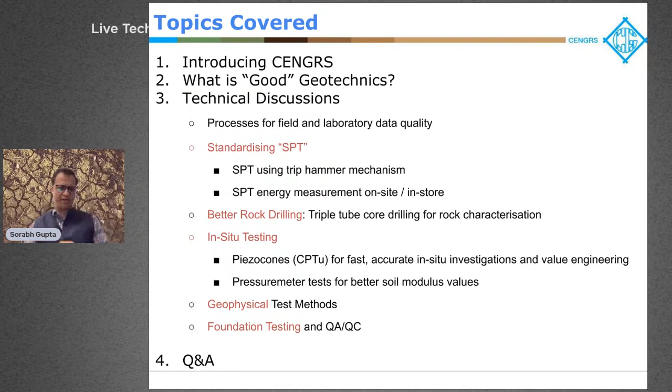So first, I would like to introduce you to my company. It's Cengrs, CENGRS - it's an acronym for Civil Engineers. Many people don't get that. We are an old company, founded in 1990, led by IIT Delhi alumni, myself included. We are now about 200 people, and we have carried out over 6,500 investigation projects across the length and width of the country in the last 32 odd years.

We do work, of course, as geotechnical engineers. We get an opportunity to work in different segments in all kinds of projects, from power plants to buildings and factories, and we have carried out the length and width.

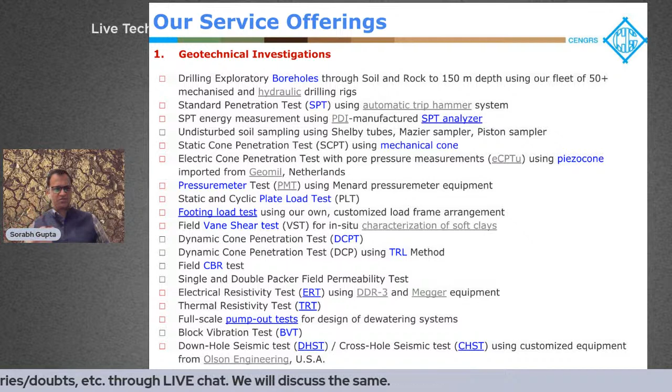In terms of service offerings, I'm not going to go through this. A lot of this is available on our company website, but it should suffice to say that almost every kind of modern geotechnical investigation technique which is out there, we carry these out in house. We are very much interested in pushing the envelope as a company. Our motto is to always push the envelope and try to bring in new technologies which are successful all over the world, bring them to our country, so we can be self-reliant.

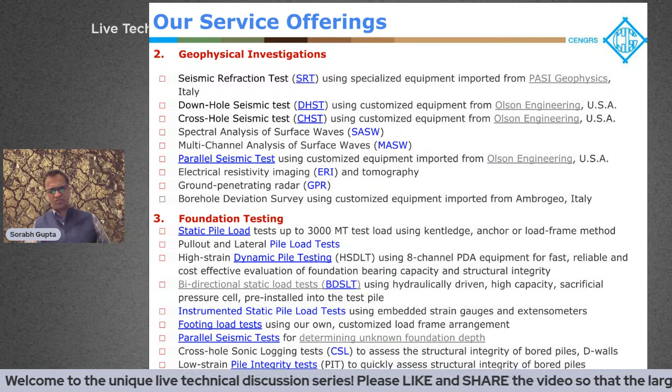and carry out the best practices from all over the globe. In terms of geotechnical, geophysical, foundation testing, these days we have a lot of tools which are available to us for proper characterization. We also take up consultancy jobs. So we take up a lot of analysis projects, whether it's Plaxis analysis or slope stability, hard stand design, and so on and so forth.

We are very active, and I think this is important. I encourage more and more of us to actively participate in professional bodies. There's so many of them. The Bureau of Indian Standards has many committees where we can upgrade the codes. Indian Roads Congress, IGS, ISSMGE, DFI. I do encourage all the participants to sign up for these professional bodies, because this is where we can interact as professionals, learn from each other, and contribute to the profession as well.

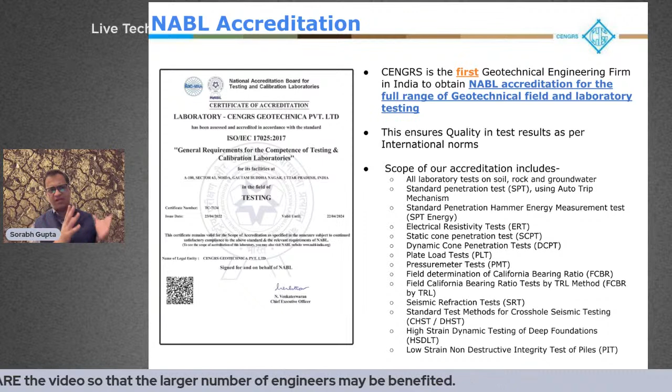I would like to announce, in fact, one of the latest developments - some of you might have heard of NABL. Traditionally, many of the geotechnical consultants adopted NABL for the laboratory. Starting 2022, I think we are one of the first companies - we have extended the range or the scope of our NABL accreditation to cover the entire spectrum of our field activities as well. And this is pertinent because we genuinely believe that a lot of the strength of investigations really comes from the field testing, possibly a bit more than lab testing even.

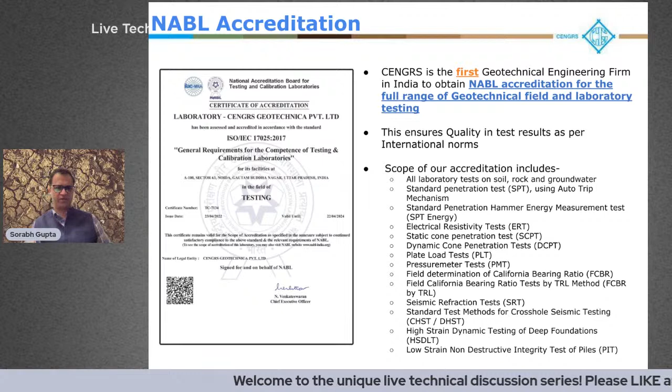So quality assurance and control on sites becomes very, very critical. I do believe we are one of the larger geotechnical databases in the country, and I am keen to work with - if you have any GIS experts, please contact me separately. I'm keen to put all this data together and develop a subsurface model for the country. We don't have that yet. I think this is something which will be good for all of us.

I'll get into it. We keep talking about good and bad geotechnical engineering. I would like to talk about, in our opinion, what is good geotechnics. We believe there is no such thing as difficult ground. If you have a site which may not have the best soil conditions, which might have some challenges - liquefaction or slope stability or so on and so forth - don't be disheartened, because just like the Rubik's cube, the puzzle is only as hard as the person who's solving it. So if you have the right team with you, the right consultants, then a lot of these problems can be solved very easily.

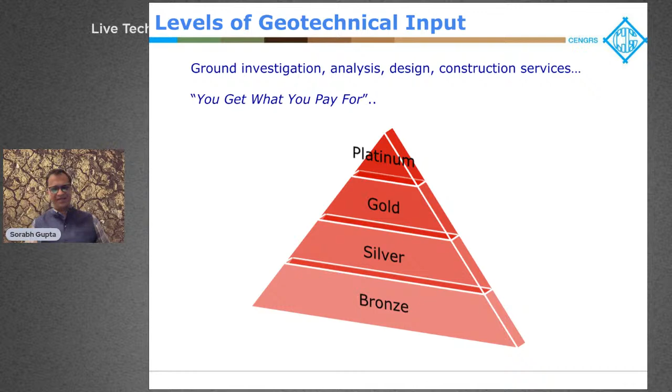This is something I borrowed from a friend of mine called Chris Haberfield, in Australia, and they talk about levels of geotechnical input, and we'll get into this. We like to characterize levels of geotechnical input in terms of bronze, silver, gold, and platinum. And the theory is, depending on your project use - if you're working in a low risk project, maybe you're building a small G+1 building in a relatively stable soil condition - then maybe you can carry out a very basic investigation consisting of a couple of boreholes, some basic lab testing, and with local experience, you can get some fairly good estimates of bearing pressure and so on and so forth.

However, if you're coming up with a high risk project, and I define high risk as either the structural demand is fairly high relative to the soil conditions, then the best way forward is to work with your geotechnical consultant and carry out a staged investigation. You can do a preliminary investigation, get some basic data, understand where we stand, run some numbers, and then we have to work together and carry out a detailed investigation tailor made for that project.

The reason I'm emphasizing this is because the scope of geotechnical investigation must never be a copy paste job. I see a lot of inquiries and RFPs where it's the same thing copy pasted without any thought about what we are building, where we are building it, what challenges we might expect. It has to be an iterative process. We have to design the scope of the investigation for each project, and the better we do it, the better the outcome, the better the optimization of foundations, the better the economy.

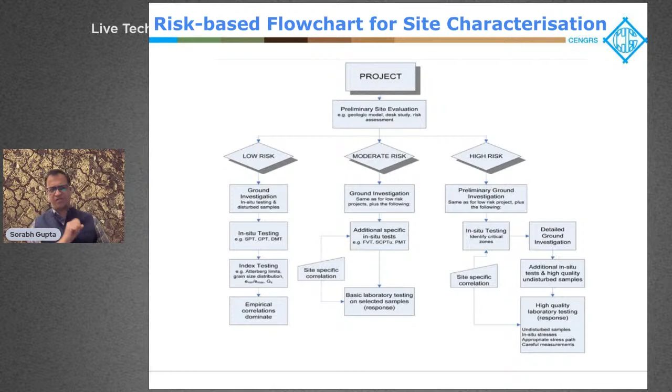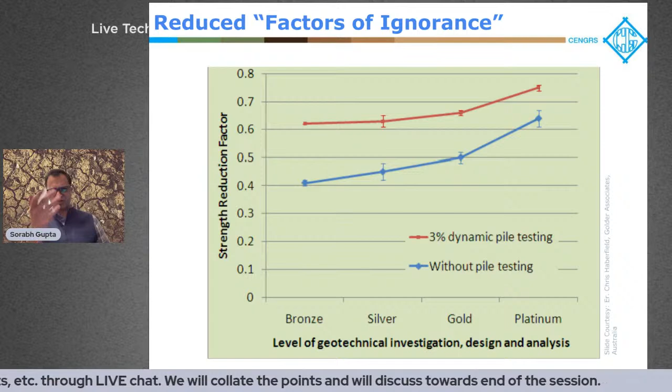We always like to say that you get what you pay for. It's important, and it's documented all over the world. If you spend on proper investigations, proper testing, you plan it, you design it, you implement it, you are going to see a lot of savings in terms of project schedules, project cost, and also risk mitigation, which is very important.

A lot of our Indian projects, although we are moving forward, we are routinely seeing issues at site during construction, reinvestigations, redesign, additional piles, and all of these things can be avoided if you get the right guidance beforehand.

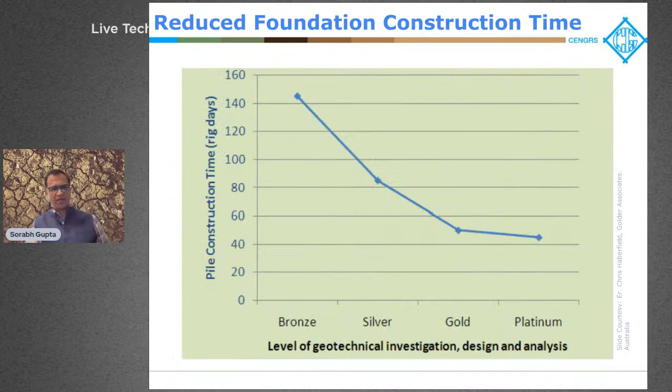This is also a study which was published, and you will see, and this might seem remarkable, that if you spend more on proper ground investigation, it makes sense that then naturally you're going to see a lot of ROI in terms of saving in construction time.

At CENGRS, we have actually documented a lot of case studies where we have done this, and we have shown ROIs of as much as 100 or 200 times the cost of investigation, purely just in foundation cost saving.

There are many areas of improvement, and I will not have time to go through all of these in detail, but let's pick out a few. How can we improve the way in which we are working today?

So before we get into advanced investigation and advanced analysis techniques, we have to understand the data which we are entering into the software. We have to understand where the data is coming from, and we have to ensure that the data is accurate. If you go to a doctor with the wrong blood test report, there's nothing the doctor can do for you. So the first step should be to get the right test results, and this is what we are emphasizing on today.

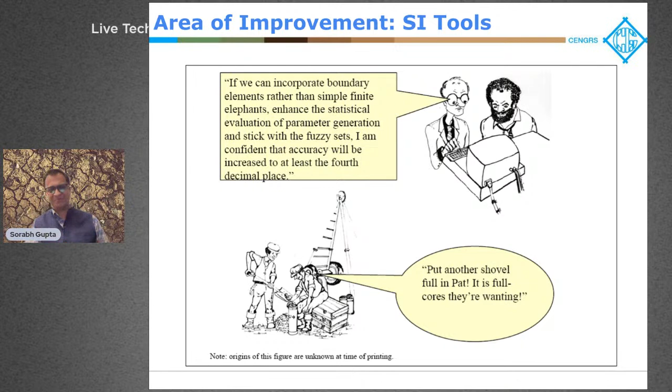In terms of tools, as I explained earlier, and we will talk about this in detail later on, these days there are a lot of techniques which are available, some better than others, some more pertinent to your project site than others. So as I said earlier, you have to tailor your approach, you have to tailor your scope for your project. And as a company, we are always keen to work with customers for this.

Many people come to us without a scope, and they come to us with a requirement, and we work with the structural engineers free of cost to work out a scope for the clients. And I'm happy to do this for any of you for your projects as well.

SPT, so I will not get into this in detail, but you can see that using advanced investigation techniques, using field instrumentation, construction monitoring techniques, will definitely be an area of improvement here.

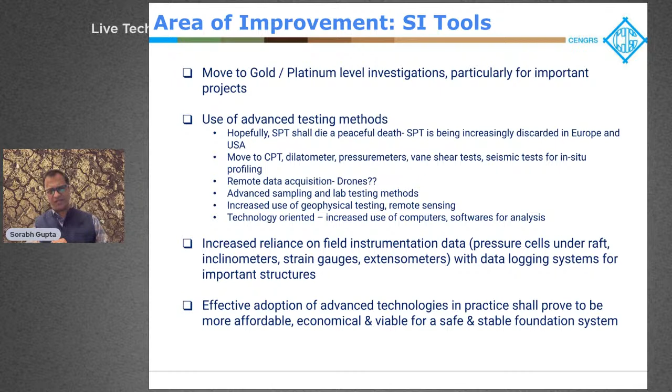I'm going to skip through a lot of this. I will be sharing the slide, but suffices to say that we do believe that although geotechnical engineering is a science, its practice is an art. So please, when you define the scope of your investigation, scope of your pile testing, work with a geotechnical consultant who can guide you properly on what needs to be done.

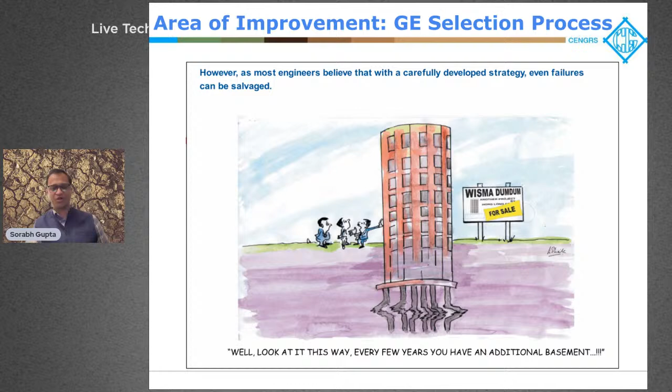And we all know about the Leaning Tower of Pisa. I think had they planned the investigation properly, it would not have been one of the wonders of the world. They got lucky. A lot of structures are not so lucky, and they simply topple. So let's not take that as a benchmark for us.

This is what I said earlier. Just like there is a difference between a diagnostic center and a doctor, there is a difference between a soil investigation agency and a geotechnical engineering consultant. And these two are not always the same. There are several companies, like ours, where they have in-house expertise to carry out investigations as well as consult on the project, but not all. These two don't have to be the same.

We do emphasize that once again, the approach must be finalized with the help of a geotechnical consultant. The actual investigations must be carried out by a company which has got strong processes to ensure that the data quality and consistency is there.

And please, I know we say this in all the forums, and I understand the limitations, but for your next project, try to avoid the L1 technique of selection. Do select your consultant, select your investigation partner based on their profile, based on their expertise, and based on what you're going to get out of it.

Remember, the cost of investigation for most projects, in India at least, is usually less than 1% of the project cost. And the impact of this investigation is directly on 10 to 15% of the project cost, which is the foundation cost. So it's simple economics. You have to make sure you are right the first time so that your project doesn't get to go in the wrong direction.

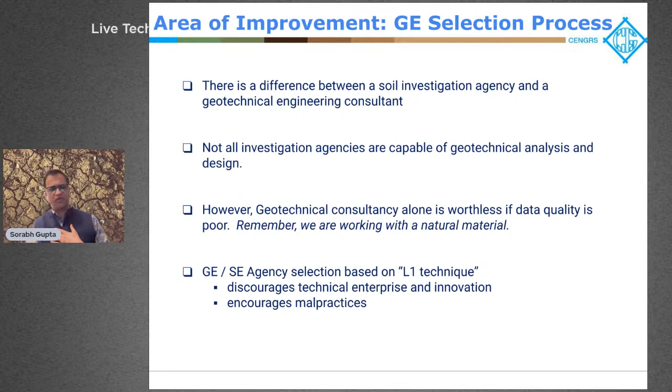As I said earlier, a planned SI program can lead to 50 to 100 times, and this is conservative, savings in terms of the foundation cost and risk mitigation. You talk to any economist, and they will say that this is a no-brainer.

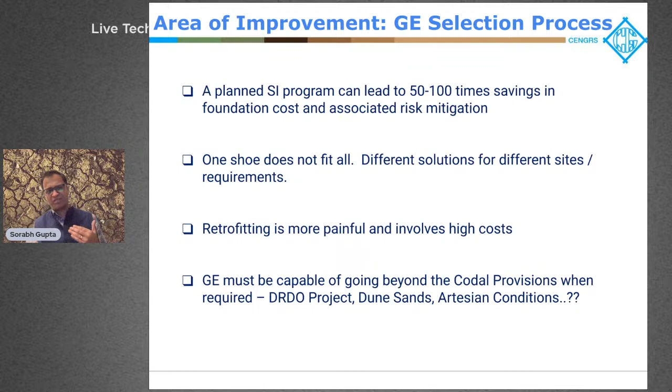Again, your one shoe does not fit all. We have to design these investigation scope for each project specifically, take into account local experience, take into account prior experience in the area, and have a discussion at the beginning of the project, not when everything is done and we're already having problems.

We have discussed this before. Especially these days, we are finding a lot of RFPs where the scope is either insufficient or just purely incorrect, or not applicable for the project site. And we do try a lot to work with the customers and give them feedback on what needs to be done. But this is something which we all have to work together on, and make sure that we use our brains at the right time.

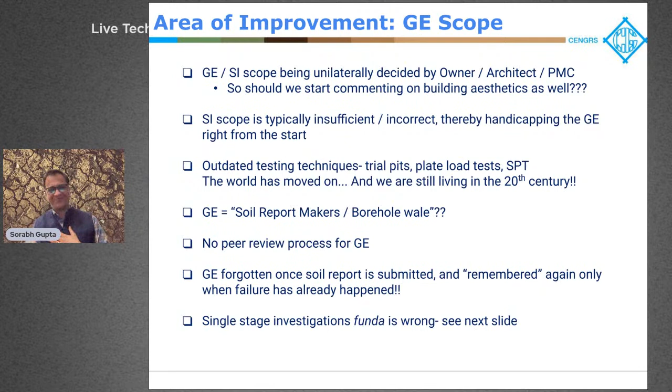This is just a point that I think a lot of the audience today consists of structural engineers as well. I think we are going in the wrong direction in our country today in many projects, wherein the owner or the PMC or the architect will normally define the scope, get a soil report, and then dump the soil report on the structural engineer, and the structural engineer works off the soil report. There is no interaction between the SE and the GE. And I think this interaction, no matter what is the size of the project, this interaction between the structural and geotechnical engineers, this is very important.

There has to be several levels of this interaction. The first must be at the concept stage. Owners must try to bring their consultants together on day one, have a brief discussion. We should understand each other. Geotechnical engineer consultant must understand what the structural engineer needs, what are they building, and this interaction has to go through all the way till the end. Even when the soil report is submitted, there must be a one-on-one interaction between us to really understand the recommendations. If there are any modifications, any changes in size, depth, then these things must be done at the design stage.

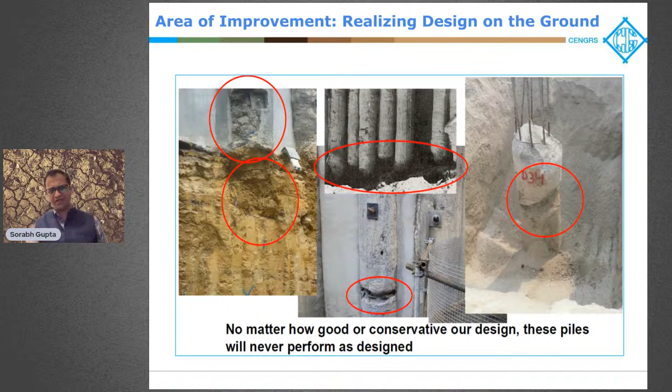And lastly, no matter how hard we try to do things well on paper, there is always a chance that the translation of that design on site is not done right. And this is very important, especially for foundation construction, because you can't see what you're building. Everything is under the ground. Everything's hidden from your eyes, and very few people understand this. So many projects, I cannot tell you, hundreds and hundreds of projects are suffering simply because of poor construction practices, ignorance at site, and it's a lot of time and money and energy being wasted on these very, very simple repetitive mistakes.

So it is important to avoid that. Again, we do emphasize that for your foundation construction, you should involve your geotechnical consultant all the way through until the construction, at least the foundation construction, is completed successfully. Because it should not be that you have one soil investigation agency and a different foundation testing agency. That should not be the case. We have to change the way we approach projects.

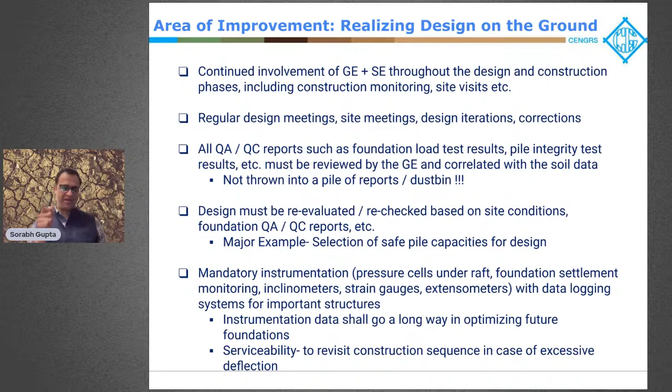Many of the contracts I see, especially for deep foundations, include the testing of the piles in the scope of the piling contractor. Now this has never made any sense to me, because it's like school mein you give an exam and you grade yourself—obviously everybody would be 100% passing in that case. So foundation testing must have a separate spec, and ideally it should be done by a third-party agency directly appointed by the owner.

So that was a quick overview. I think we've exhausted about 15 minutes. I will now get into some technical discussions. And this is the scope I made. I haven't picked everything—I've tried to pick only 5 or 6 points where I thought we can go into detail in terms of what are the advances in investigation tools today, and what should be done.

Again, we are talking about good geotechnics. This, in our opinion, is what should be done. We'll talk about processes for field and lab data quality, the SPT, better rock drilling, some in-situ test methods. I've just selected two for today: geophysical methods and foundation testing.

So let's get into it. Quality and processes. We saw this earlier, and I think this is just to illustrate.

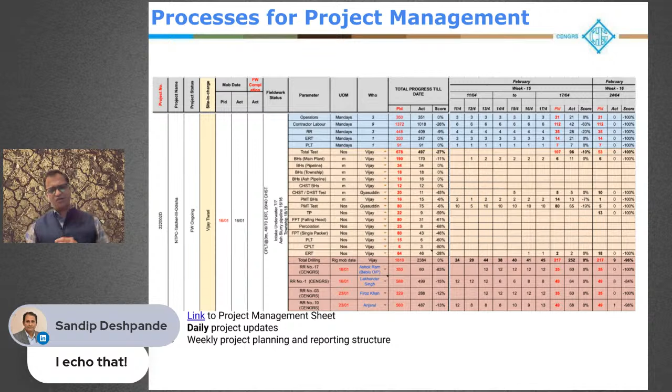See, if you think about it, every investigation job—the quantum of data being collected in the field and in the lab is tremendous. I always tell my customers that, hey, if you're not feeling well and you give a blood sample to a lab for testing, will you take a chance? Will you go for the cheapest lab, or will you go for a lab where you can actually trust the results of a blood test? Obviously most of us would like to go to a lab which is trustable, reliable, and we should know they have processes and systems built in to ensure consistent quality and won't give us the wrong results. We should think about our structures the same way, right?

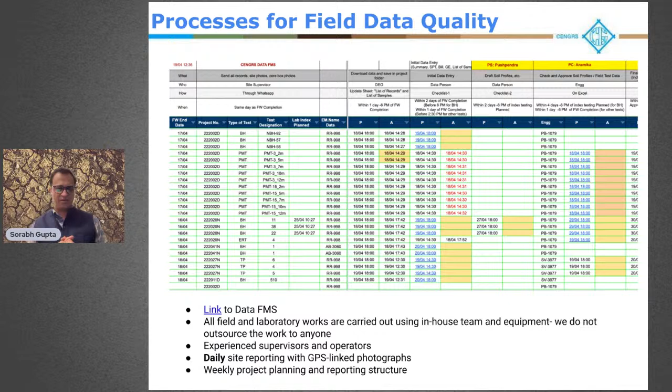At CENGRS, for example, just to illustrate, we have built a lot of systems in-house to track samples, and this is part of our NABL intent as well. We track each and every sample—typically on a site there might be 200, 300 samples collected, minimum. So we have built fairly complex systems in-house to make sure that each and every sample is tracked, tagged, and the timelines for testing and so on are all tracked in-house.

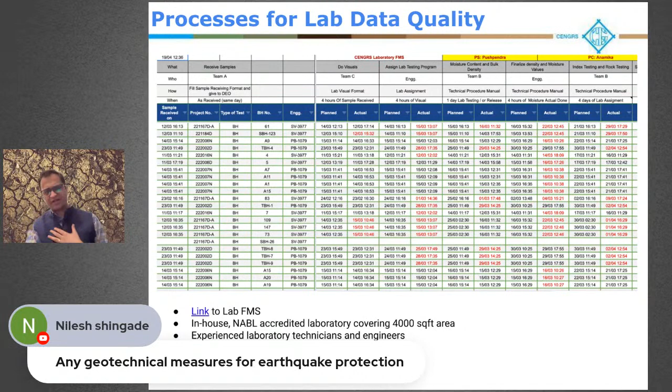It is also important, and I think if you have a bigger project this might be worthwhile—I have developed an Excel file also. Very often I see scope, maybe 200 or 300 boreholes, given to an investigation company, and they're producing reports as well. But very often I find that if I do the simple math, the lab equipment is not even sufficient to carry out the quantum of testing which they're reporting. I will leave it to the knowledgeable audience to understand how that might be done. I don't want to get into this today on this forum, but obviously in every industry there are people who are cutting corners, and as a purchaser or owner we have to be cautious to control and understand what we need to see to avoid issues later on.

This is just part of due diligence. Instead of going for the L1 technique, I think it's more pertinent that we do due diligence on the investigation partner to make sure they will treat your project like their own baby as well.

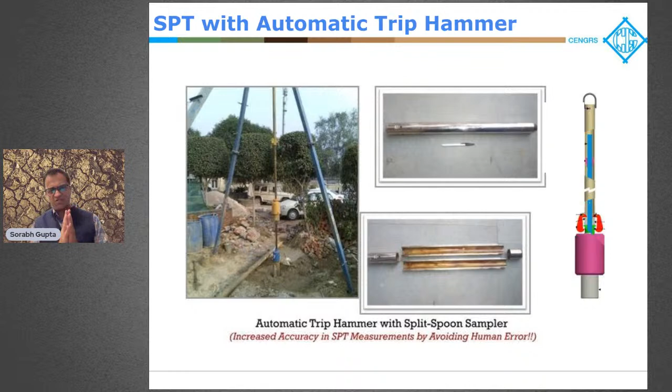So calibrate your SPT hammer, ensure automatic trip hammer so you have consistent drop height, clean your borehole properly, use the right rods, use spacers. There are so many do's and don'ts. And if you do all of these right, you are going to get much better SPT values for your design.

The next value add which we started doing, and these days on most of our projects - this is a recent development. The SPT value which is used in almost all correlations, including bearing pressures and pile capacities, is supposed to be N60. N60 means it assumes that 60% of the energy is being transferred to the soil. This is the baseline assumption for almost all correlations we use. Until about a couple of years back, to be honest, none of us really knew what our energy transfer ratio was, because we never measured it.

Now we have this tool, and a lot of geotechnical consultants have this tool - it's called an SPT analyzer. It's based on the PDA concept, or wave mechanics. What we do is connect this instrumented rod when we do the SPT. It's a field test, and it actually measures your energy transfer ratio on site.

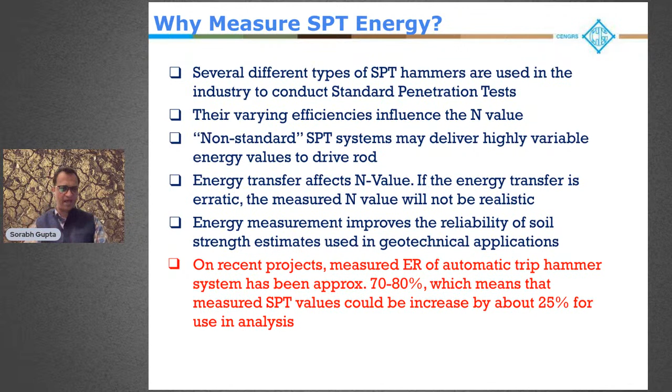Why is this important? Because it makes a huge difference. For example, for our regular shell and auger kind of rigs with automatic trip hammer, we have found that the ETR value we actually get on site is as much as 70 to 80%. It's not N60 - what we're actually measuring on site is maybe N80, N70. That means if I measure an N value of 10, the actual N value for use in design would be 25% higher, and consequently your bearing pressure would be higher. So this is the amount of difference it makes.

If you measure your SPT energy, on one hand your ETR value is more than 60%. But on a lot of setups using a calyx machine or rotary drilling rig with a manual hammer, sometimes we are measuring ETR values of maybe 30, 40%. That means the N value you will end up getting would be much higher than the correct N value. Your design would be unconservative. There would be some risk involved, and there might be some failures of the foundation later on.

This makes a huge difference on your bearing pressure value. See, the bearing pressure—and I always like to talk about this—I think we sometimes confuse bearing capacity and bearing pressures.

Bearing capacity, the ultimate bearing capacity, is a strength parameter. That is the level at which the soil will fail below the foundations. But usually we talk in terms of stiffness. We are concerned about tolerable settlements, and we are limited by settlement criteria.

The bearing pressures are directly proportionate to your N value or to your stiffness of the soil. There is no factor of safety here, which means that if you are inputting the wrong N value or the wrong stiffness parameter, the wrong modulus parameter, you will proportionately get the wrong bearing pressure for design.

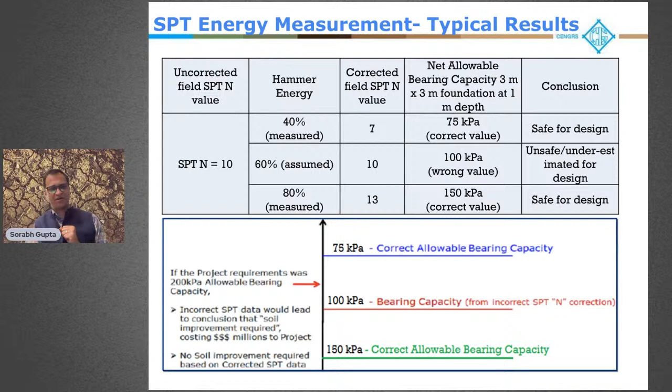So this is just to say, not to underemphasize—I think getting the right data on site, you can see how important this is for everything that follows.

I am now talking about better sampling—I haven't added the slides for this yet, but I just want to make a small note. I think the Shelby tube sampling is very much abused in our country. The emphasis in many of the RFPs is on number of samples, right? I think we need to change our mindset.

We need to change or shift the emphasis from number of samples or number of tests to quality of samples and quality of the test. If you take a rubbish sample on site, if you've got hard strata and you're just pounding a Shelby tube in that hard strata, you are not going to get reliable lab results out of it.

You are not going to get reliable shear parameters and consolidation parameters from that kind of a sample. So let's understand why we are sampling, for what purpose, and let's try to adapt our approach accordingly. I believe that if you have hard strata and N value more than 30, Shelby tubes is really of no consequence. It doesn't help you.

There are other samplers which are available. These days, for example, we are using Mazier samplers, and we are able to sample—we are able to retrieve very good quality samples, even in sand below the water table. We are able to get fairly good quality samples for testing. So sampling is important. Wrong samples will give you the wrong results.

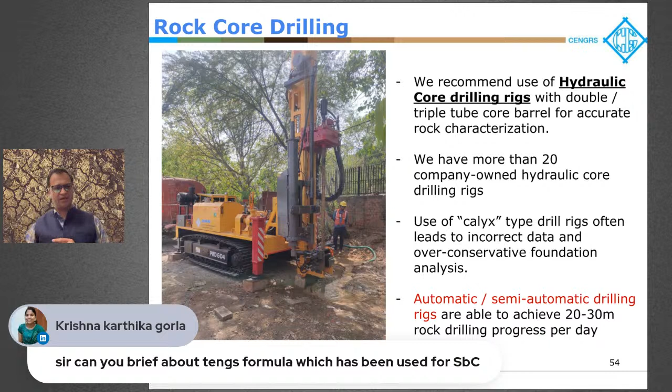Same way with rock drilling. We have a lot of equipment which is being used for rock coring. If your project has got shallow rock, or your foundations are expected to bear on rock, characterizing the rock mass becomes very important. The better you characterize the rock mass, the better you can understand the behavior under foundation loading.

In India, we are seeing a lot of kinds of rigs. Many people are using calyx rigs with single tube core barrel. Many people are using locally fabricated rigs. You have to have the right tools for drilling. If you don't use the right tools, you will end up getting a report which is not representative of the actual conditions at site.

What we recommend very strongly is that in cases where rock drilling has to be done, we should only use hydraulic core drilling rigs with double tube core barrel as a minimum, in case you have fractured rock or weathered rock conditions. Please spend those extra couple of rupees and go for triple tube core barrel. It will make a huge difference in your output.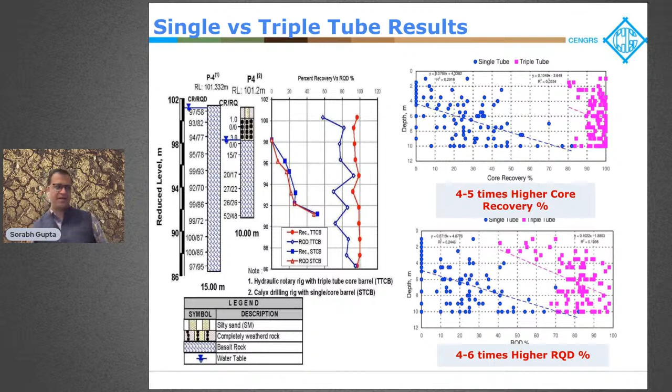What was earlier defined in the report as severely fractured rock, and designed almost like a dense sand layer, the same rock turned out to be very, very good rock—only slightly fractured, with very high core recoveries and very high RQD values. And your entire bearing pressures, your construction methodology, everything changes based on this.

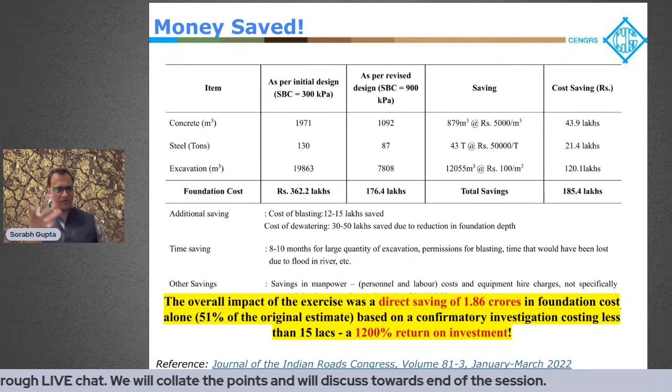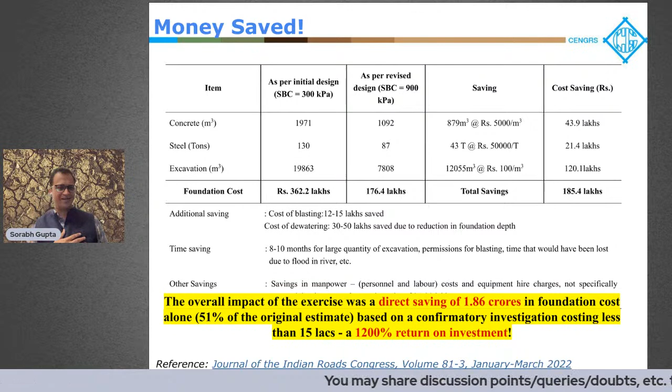And cost changes for the same project. We worked with the customer, did a quick math, and realized that by spending maybe 12-15 lakhs on this confirmatory investigation, the direct impact of the results was almost 2 crores. That's only in the cost of the foundation, only in material cost. You forget the time and everything else. So that's that by itself.

I promised you I'll show you some case studies. That's a 1200% ROI. You talk to an investor and he'll be like, hey, that makes sense, do it. So I will get into talking about in situ testing.

I want to talk about in situ testing. Going forward, as the projects are getting bigger, our time is getting shorter. I think we need to change our approach. Boreholes is not investigation, and investigation is not boreholes. There is a host of other techniques, so many techniques available where you can carry out in situ testing, field testing, and characterize the soil in the field.

There was recently at DFI a presentation by Dr. Madhav, and I would like to quote him. He said something very nice. He said that there is a difference between soil and ground.

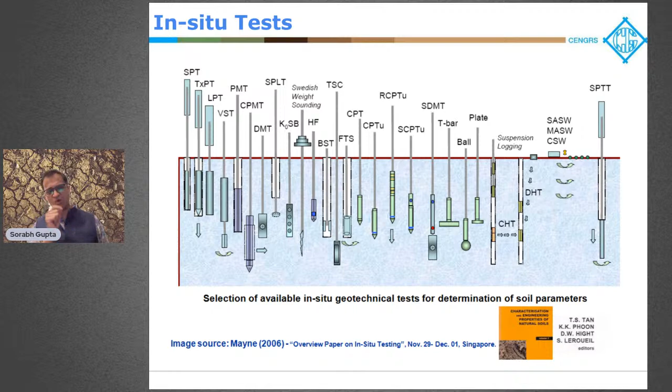Soil is that small sample which you take out, maybe from a borehole or elsewhere, and you test it in a laboratory and come up with a result. But soil is not ground, and your structure is not going to be sitting on soil. Your structure is sitting on the ground. The ground is affected by various things. The soil is not going to be homogeneous, isotropic, so on and so forth.

There are going to be lateral variations. There are going to be vertical variations. There are going to be variations in the groundwater table. There are going to be so many factors which we have to understand before we conclude if the foundations we are designing are safe for that particular site.

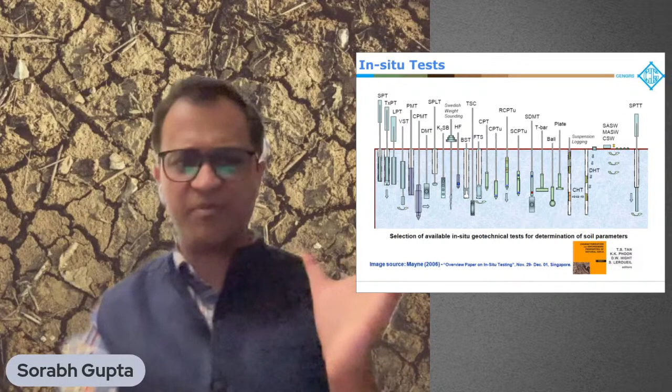I honestly believe that in situ testing is one of the best ways to understand the ground, whereas lab testing is good for understanding the soil. And both of these have to go together.

In terms of in situ testing, I think most of us are familiar with the standard penetration test, DCPT, plate load test, cyclic plate load test, block vibration test. This is what people used to use, and this is what, maybe even 20, 30, 50 years back, most of the investigations were done using.

We then moved, in the last 20 years I would say, to use of mechanical cone penetration tests, some pressure meter tests. We moved from block vibration to carrying out downhole and crosshole seismic tests. So there is some improvement which has happened.

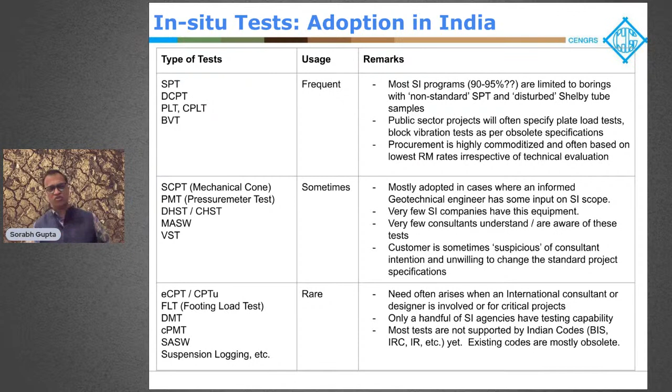But now, a lot of projects, we are changing the scope. We have come up, we are doing a lot of piezo cone testing, and we'll talk about that, to replace the mechanical cone. Footing load tests as a better form of doing a plate load test, I would say. There's also DMT, which is not very popular in India yet. Cyclic pressure meter testing, SASW. So there are a lot of tools, and it's important to understand these tools and see if we can use them on our next project to our advantage.

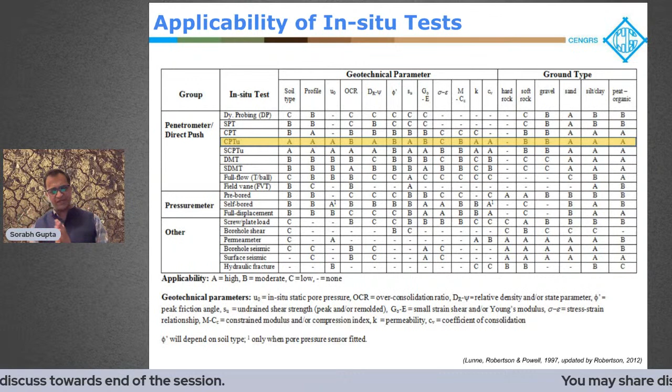This table I picked up, I think from the CPT manual. A lot of these methods are available. It's like working in the kitchen. If you're cooking, you have a masaldan with different types of masalas available to you. These tools are like that - different masalas, lal mirch, wal mirch, sab kuch hai. But it depends on the chef, on the cook, to decide which masala to use in which recipe. It's not that if CPT is good, it works everywhere.

You can't do that. It depends on your site. If you have a soil site, maybe with loose soils or liquefiable issues, CPT might be a fantastic tool. If you have a rocky formation, CPT will not work. So we have to understand each of these in situ tests, and once again, we have to plan our investigation based on our site, based on our expected strata conditions, and based on the anticipated loading conditions.

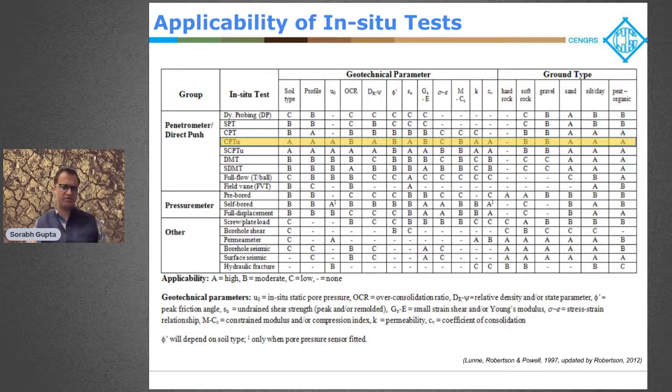Let's talk about the CPT. CPT is fairly new, and in the last 2 or 3 years, I think Sanjay, along with a lot of other consultants, we are making a big push for CPTs in India. We're literally pushing CPTs in India. And why is that?

Number one, CPT is very quick. If you're doing a borehole investigation, say as an example, if you want to do a 30-meter borehole, the time and cost of mobilizing a drilling rig, drilling that borehole, sampling, transporting the samples to the lab, doing the entire spectrum of lab testing - this is easily a 15 to 30-day effort before you get some kind of data for the soil report or for the foundation analysis.

The CPT is a fully instrumented in situ test. So you can do a 30-meter, 40-meter sounding in just under an hour on site. The data is all digital, it's software driven, and you can get your foundation recommendations in a matter of just a couple of hours. It's input and output.

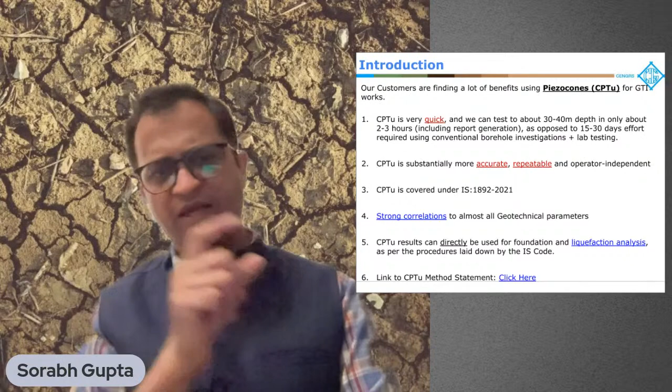Quick is not the only thing. The CPT is also substantially more accurate. Your SPT interval is about 1.5 meters normally. CPT data interval is only 2 centimeters. So it's continuous profiling. There is little chance of missing if you have a loose seam or a thin layer in between. A CPT will catch it, whereas boreholes and other tests might miss it.

And we will see how the CPT results - I'll show you how they're correlated to almost all geotechnical parameters and how they can directly be used for analysis as well.

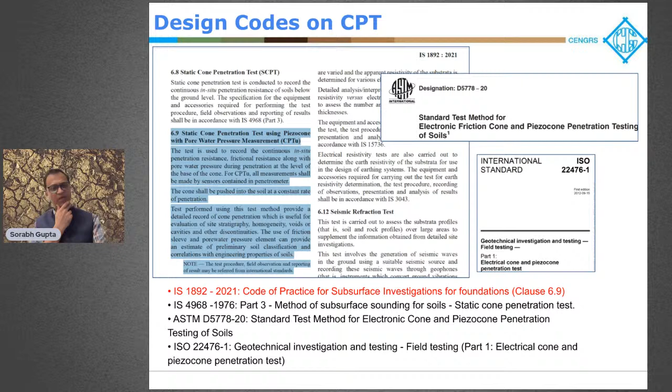Just a side note, the CPT is covered under the code. It's currently already covered in the IS 1892. And in fact, I am a member of a BIS committee. We are now in the process of coming up with a fresh code, particularly for CPTU or for the piezo cone.

This is what we used to use - this is a mechanical cone, which in India many people have used in the past, and you get analog data. The improvement to that is the use of a piezo cone, which is an electronic cone. It kind of looks like this. This is the cone, it's very simple. The cone is instrumented - it's got load sensors on the sleeve, on the tip, and pressure sensors. This cone is hydraulically pushed into the ground at a constant rate.

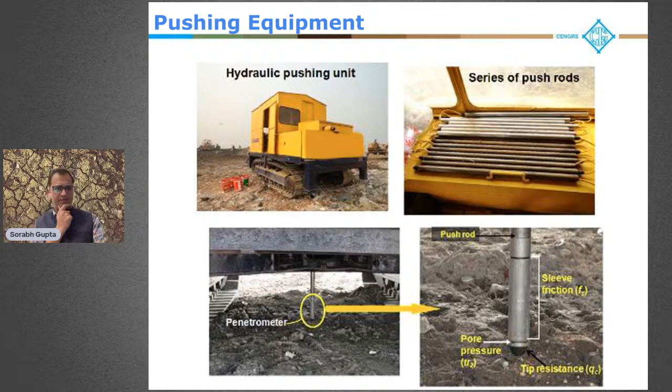A lot of these slides actually are hidden, so I'm just skipping them. I don't know why they are still being presented. So this is the CPT, right?

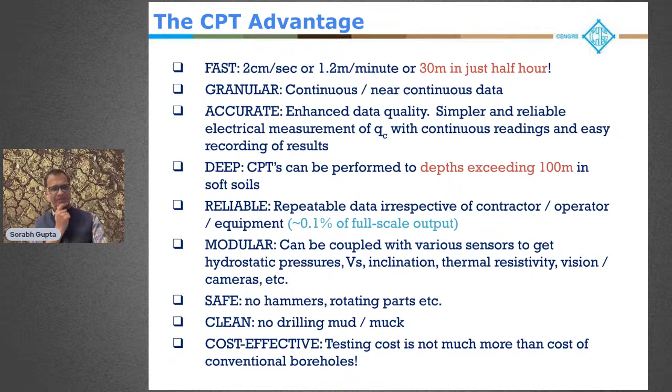So if you do a regular investigation and you want all these parameters - your shear wave velocities, your SPT value, strength parameters, stiffness parameters - usually you would have to do a lot of different kinds of tests on the same site at a large cost. I love the CPT because in a single push and with the right tools, it's possible to get all of these parameters at the same time at the same location.

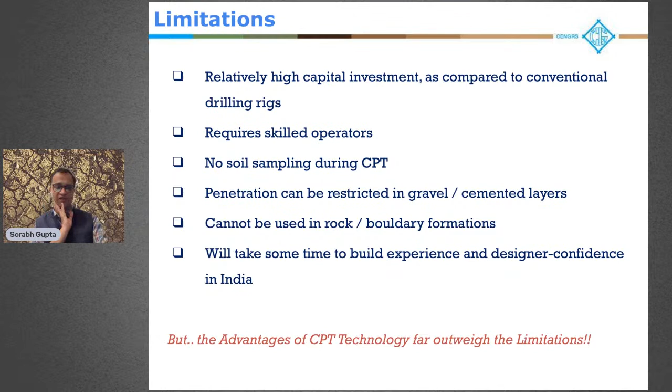And we'll see how. The only limitation of CPT is you can't push the cone in hard strata - if you have gravel or rock, you can't push it. So this is one limitation. But you see the kind of data you get - tip resistance, sleeve friction, pore pressures, and you also get your soil behavior type. It's fairly accurate and very repeatable.

Doing two boreholes at the same location, the SPT values will almost never match. But if you're doing CPT soundings at the same location - we have done this - it's accurate to about 0.1%. Its repeatability is there.

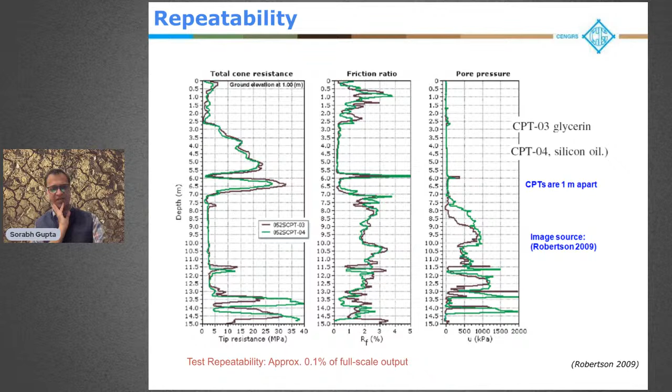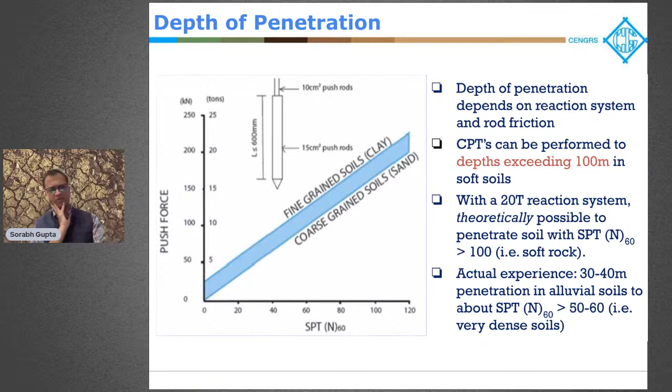We have done CPTs up to 50, 60 meters. It depends on the kind of soil, with a 20-ton pusher. And these days in North India, in the alluvium, it's not uncommon - we are able to push 30 to 40 meters using the CPT pusher.

Sorry, I'm jumping slides. Just in the interest of time, I want to take questions.

The CPT data can also directly be used to identify the type of soil. It's not really soil type in the mechanical sense - we call it soil behavior type. But this is very well correlated. If you push a CPT, you get your soil behavior type.

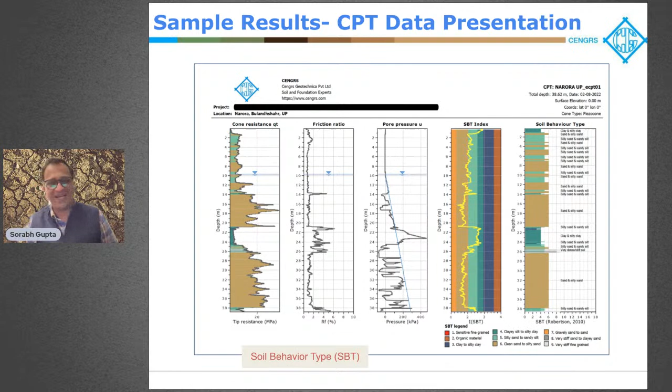This is something which almost certainly would have been missed in a borehole investigation, unless you're lucky enough to get a sample right here. So that's the advantage. You also, in the software itself, or you can make an Excel file for this - it's very simple. The CPT results are directly correlated to almost all geotechnical parameters, and the correlations are very strong.

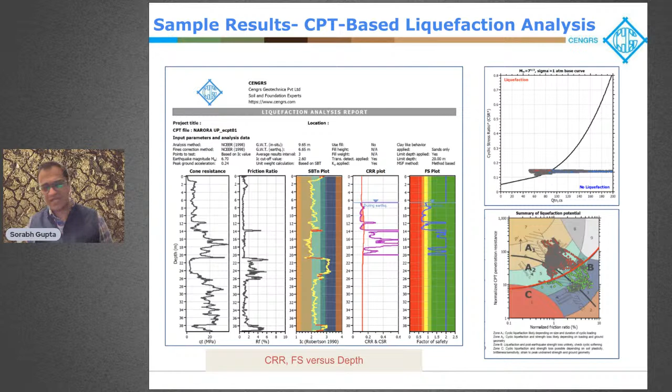But you can also get permeability, Young's modulus, relative density, friction angle, constrained modulus, shear strength - this is a geotechnical paradise. All the shear wave velocity, state parameters, all the geotechnical parameters neatly organized is something you can get from CPT sounding.

Liquefaction analysis, of course, I've always held that, and this is internationally accepted - I think CPT-based liquefaction analysis is most robust. If you have a site where you're suspecting liquefaction, please definitely carry out CPTs, because the results you get will be much more robust, much more trustworthy compared to any other investigation tool.

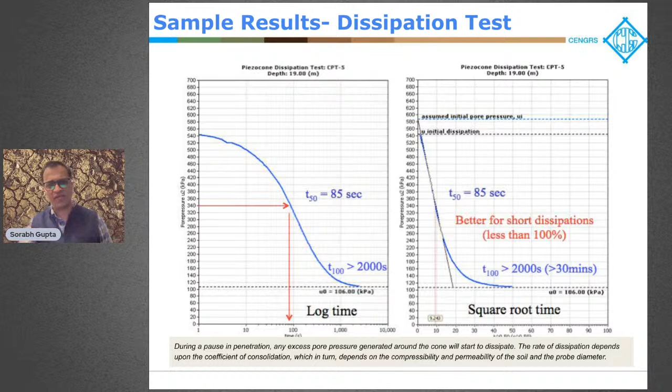Lastly, in a CPT, you can also stop the cone and let the pore pressures dissipate, and that is called a dissipation test. This helps you get a lot of your consolidation parameters in situ. So rather than doing a falling head permeability test in a borehole, you can do a dissipation test in a CPT, and you get some fantastic in situ KH values, CV values in situ. Very good for soft clays, fantastic for soft clays.

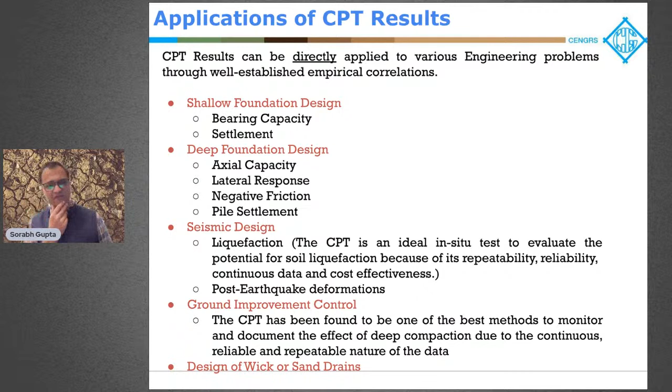That said, globally, people don't really go from CPT data to conventional geotechnical parameters and then do analysis. If you think about it, pushing a cone is kind of like driving a pile. So many years back, the Dutch quickly figured out that CPT results should directly be applied for foundation analysis. It's covered in our IS codes as well. In fact, the CPT-based correlations are supposed to be very robust for foundation analysis, and we do this now.

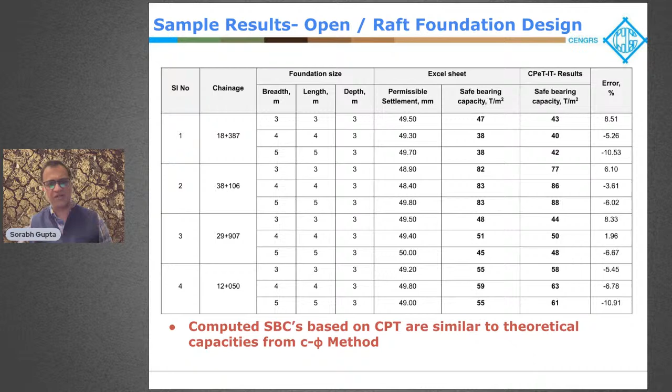We use our CPT results to predict foundation settlements. We have compared it with conventional analysis, and found a very good comparison for all our projects. You can carry out pile capacities - you can estimate safe pile capacities from CPT data, and once again compare that with your conventional analysis. You'll usually find a very good comparison. CPT-based results are often higher, but we won't get into that. And if you're doing ground improvement, obviously CPT-based QA/QC is very important.

All right, so can you help me, Bhavinji, it's already 5:24. I'm going to go quickly because I really wanted to focus on questions. Can you see this screen? Yeah, tell me, the pressure meter test. Thank you so much. All right, yeah, so I'll work off here. So we finished CPT, right?

I just quickly want to touch upon another one of my favorite in situ tools, the pressure meter. It's a lovely tool, actually. You'll be surprised, for example, if you go to France, almost all their investigations are done based on pressure meters. They would be aghast if you tell them that we want to do boreholes with SPT only. They're like, how can you design without a pressure meter?

Why is the pressure meter important? It is, to the best of my understanding, one of the best methods to estimate your deformation modulus of your soil, your E value, your Young's modulus, among other parameters. And why is that? Because you're actually mimicking the...

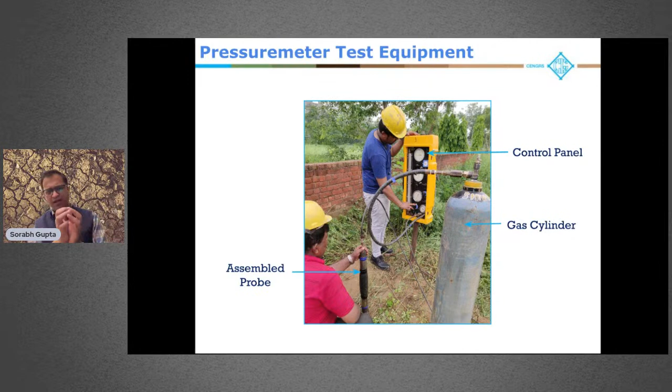Okay, so first, how do you do the test? You make a borehole and you take a probe here. There's a simple probe like this, think of it like a balloon. You put it in the hole and you inflate the probe. Simple as that. And what you get is a pressure versus volume graph like this. It's very simple. Naturally, the slope of that graph would correspond to the deformation modulus, or correspond to the stiffness of the soil around the probe.

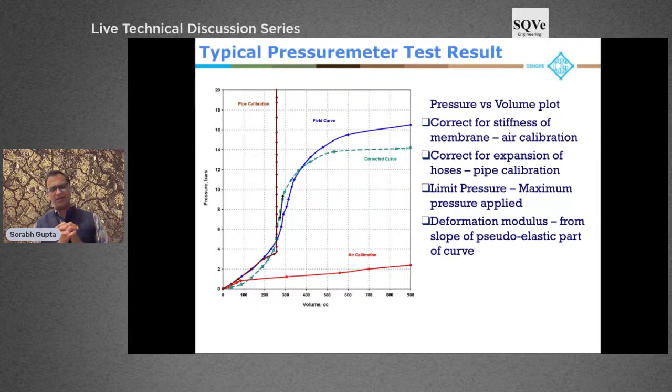It's a very good test because it's in situ. Usually in geotechnical engineering, we estimate the E value based on any number of a thousand correlations which are there with N value, with this, with that, or we get it from UCS values, and all of those correlations have a lot of limitations. In fact, if you actually plug in correlations from Bowles and Teng and other places, you will find that sometimes there's 100 times difference in the E value which each of the correlations predicts. How do you choose the right E value?

We usually end up either overestimating or underestimating the E value. And the E value, as we discussed earlier, is the most critical parameter for predicting serviceability criteria, for predicting settlements, for predicting deformations. So the pressure meter, since it's a physical test, done in situ, is a large strain test. I do believe this gives you one of the most robust estimates of deformation modulus which is out there.

I want to just show you this slide to emphasize what we talked about. We did this project in Cuttack, with L&T I think, where we did boreholes, some mechanical cone SCPTs at that time, and some pressure meters. Then, as an exercise, we calculated the elastic modulus profile based on each of these methods for the same site. Now look at this.

This here is the regular, empirical E value which we get from N value, which is 2.5 times N plus 15, as given in Bowles. So this is what we get, and this is what most of us are using for our analysis.

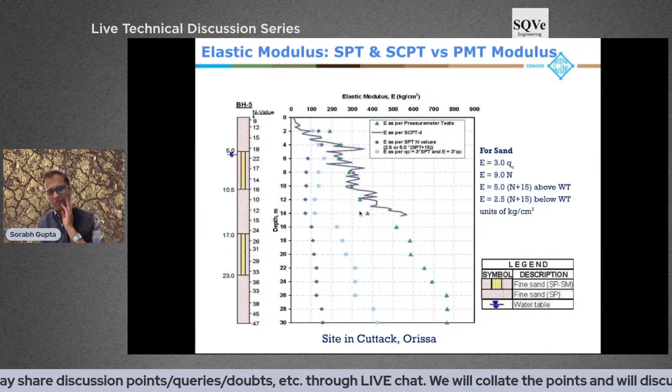Now, that's huge. What that means is that if I design based on these E values, my bearing pressures would be 25% of the actual available bearing pressure in the soil. So this becomes very important. If you are doing underground structure, retaining wall design, if your bearing pressure is a problem, stiffness is a problem, deformation is a problem, I think this is a worthy investment on most sites.

And you can do the pressure meter, unlike the CPT, you can do this in soil as well as rock, at least weathered rock. You can do this test.

Geophysics is catching on. I would like to caution, although we do a lot of geophysical investigations in house, we always like to caution that it's never any one test. You can't just do CPTs without doing boreholes. You have to have a combination of different tests, different tools, so you can come across the way we did here, so you can actually reach a conclusion. Same way, geophysical methods have a lot of advantages in terms of time, in terms of access, but it's not the holy grail. If you want to use geophysical investigations, use it, tailor make it for your project, but always correlate it with conventional geotechnics as well.

Just quickly, I will not go through this in too much detail, that's not the agenda of today's talk. But if you have high wind loads, a lot of dynamic loads, machine foundations, it's a vast improvement on the block vibration test or the cyclic plate load test. These days, hardly anyone is doing that. Usually, we are doing cross-hole seismic testing.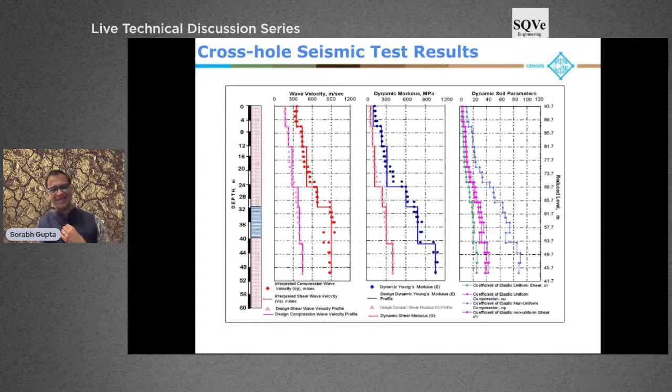Small point: please never do a cross-hole seismic test without asking for a borehole deviation survey. I always like to emphasize this because remember we are measuring the time that the wave takes to arrive in microseconds - that level of accuracy. But it's ultimately distance divided by time. So the distance between one borehole to the other, we do not know.

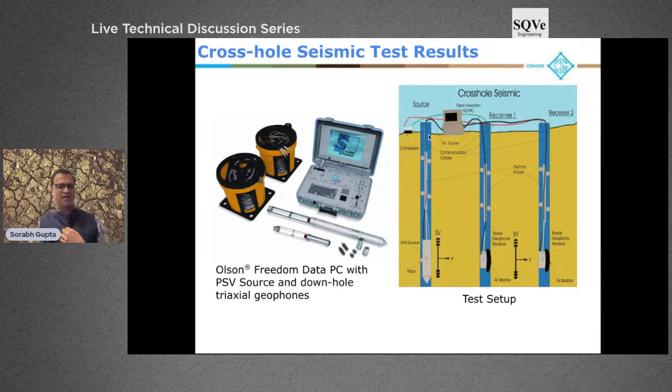Normally, people will just put 3 meters or whatever the surface distance is. But boreholes are never vertical. They will always deviate in all kinds of directions. So doing a deviation survey is very, very, very important. It's also recommended by the ASTM code because without this, your cross-hole seismic test results will be highly inaccurate.

Seismic refraction test is great. I see this test being abused a lot also, unfortunately. But if you have a site like we did in Delhi Metro, where your rock outcrop is varying, and you want to figure out the variation in the depth of hard strata, refraction testing is fantastic, as long as you can correlate it with your in situ borehole data as well.

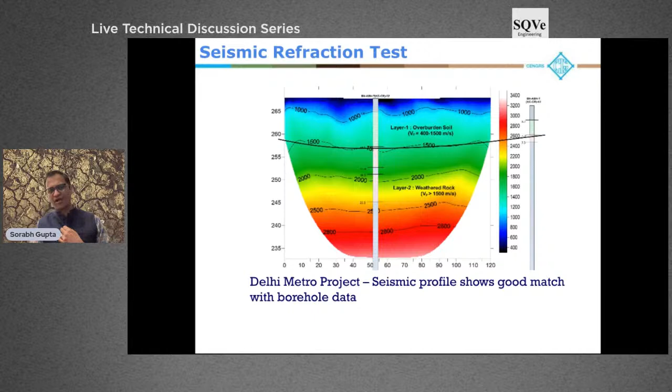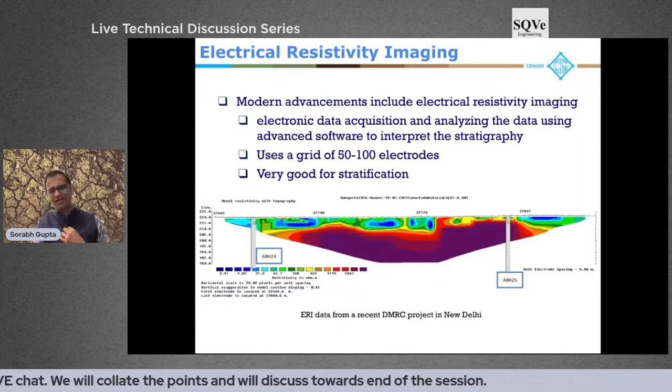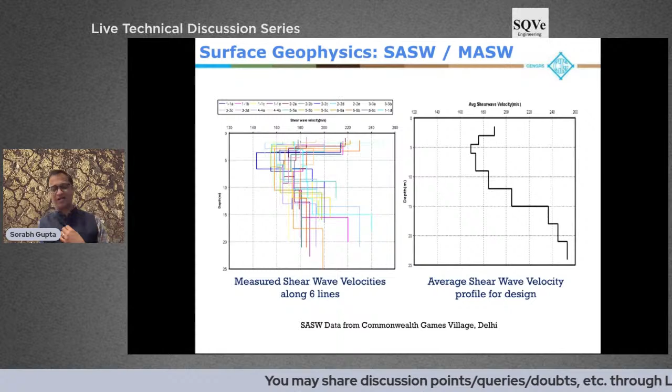Resistivity testing is also another way you can do ERI, or electrical resistivity imaging. It's another geophysical method, also very good for site characterization. Very good even for figuring out if there are voids in the ground. Very robust. And then there are other surface geophysics methods - there's SASW, spectral analysis of surface waves, or multi-channel analysis of surface waves, which are available to us.

Quickly moving on, I want to talk about foundation testing. Remember, we said that no matter what you do in design, you will fail if you can't translate the design on the site. We do a lot of static pile load tests these days, and this is conventional - most people know about this.

I think it's also very important to see that a pile will either fail geotechnically or structurally. So we have to check for both. Structural failures in the pile can be tested, and there are many methods available, many NDT tests.

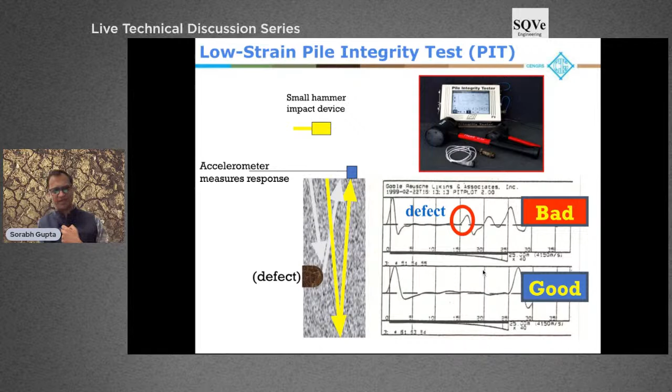There's the pile integrity test, which is a very simple test. You put an accelerometer on top of the pile and you hit it with a small hammer. It's a very simple test based on wave mechanics. It's a low strain test. You can even get a profile of the pile, a theoretical profile of your pile.

For bored piles, I think doing a pile integrity test should be mandatory for 100% of piles, every time you do bored cast-in-situ piles, just to check and make sure structural continuity and structural integrity is intact.

I do want to caution you though, if you're doing foundation testing, you might as well do it right. Once again, like the way we talked about investigations, let's not go for L1. Select a testing partner whose report, whose results, and whose processes you can trust. Otherwise you'll simply get a report which is generated saying pile is okay, pile is okay. It makes no sense, it's a waste of money.

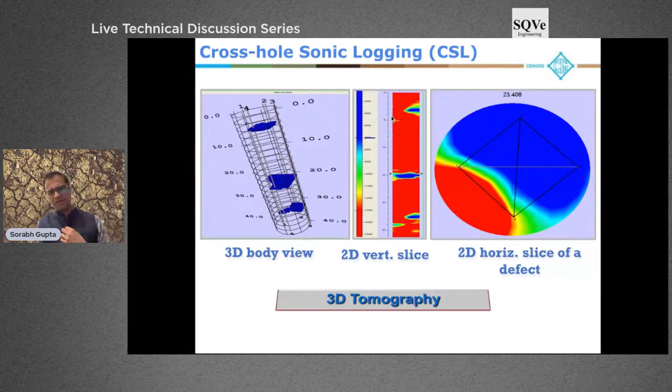Another test for structural integrity of piles is cross-hole sonic logging. A very good test. The only disadvantage is that you have to put access tubes in the piles, so you have to pre-select the piles. But you can put your probes down the pile and get a fairly good idea of shaft continuity using this test.

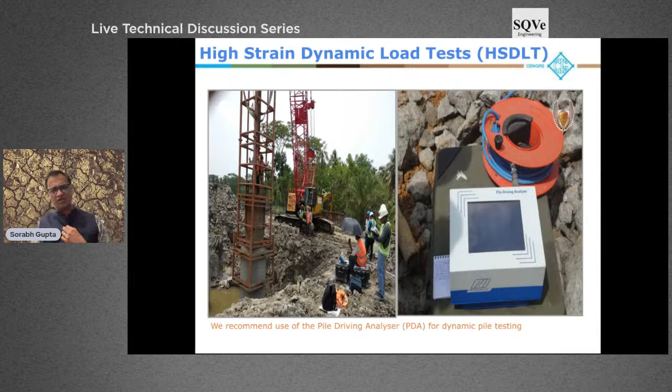An alternative, and a very good alternative to static pile load test, is the dynamic load test. This has been around for many years, more than 50 years. It's used globally, and we are doing a lot of this. Right now we're doing this in Pune Metro, in fact. So the dynamic load test, I think, is also another good technique.

It's very fast, much cheaper than a static pile load test. The other advantage is that unlike a top-down static pile load test where you only get a load settlement curve, here you actually get a lot of other data as well. You can get an idea of the pile's structural integrity, and also an idea of your shaft distribution versus your toe resistance, something you don't get in a conventional top-down test.

The only disadvantage of this test is that you need a solid partner, because otherwise it's garbage in, garbage out.

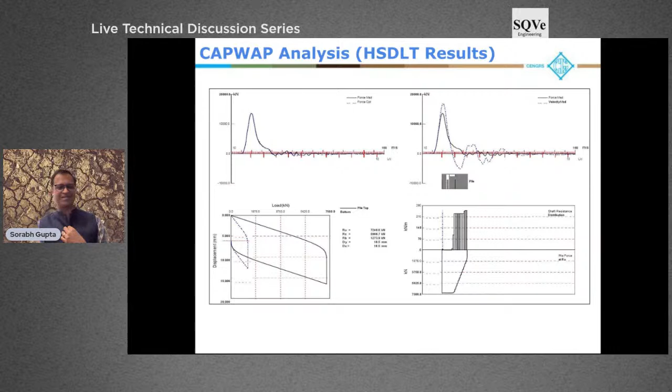I just want to touch upon this: we have done a lot of tests where there's an existing building and maybe you have a TBM going under the building, and they don't know the length of the foundation below the building. So there are NDT methods like parallel seismic which are available to figure out the length of unknown pile foundations. We also core a lot of piles.

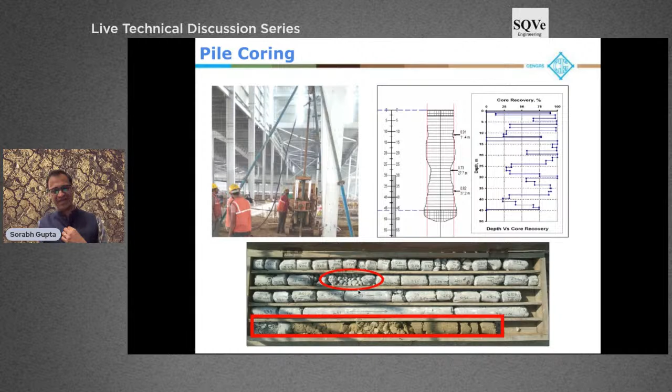Sometimes your NDT methods are not sufficient, and you suspect some structural integrity issues in the piles. We have cored piles down to 60, 80 meters. And you know what, sometimes when you do that and get the results, it's very discouraging, because you actually see how much can go wrong, particularly in bored piles. You see crushed concrete, you see soft toe conditions, and it's scary. It's very scary for us, but it's important to test.